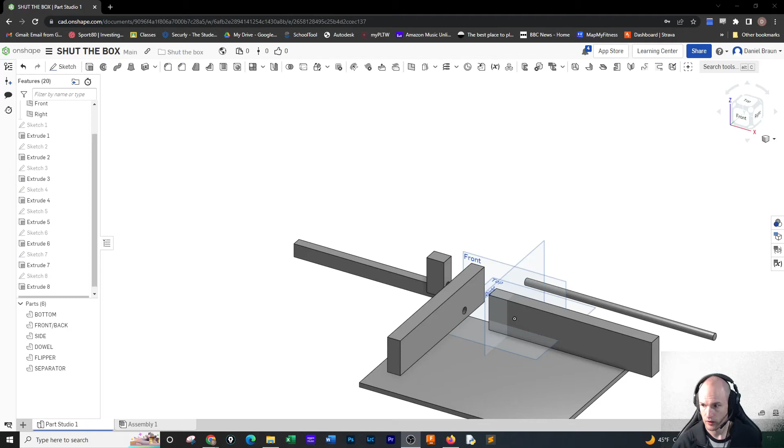So now that we have all of our pieces, we're going to go into the assembly. I'm going to insert the pieces. I could insert the whole part studio and add what else I need, but I'm just going to insert the bottom first.

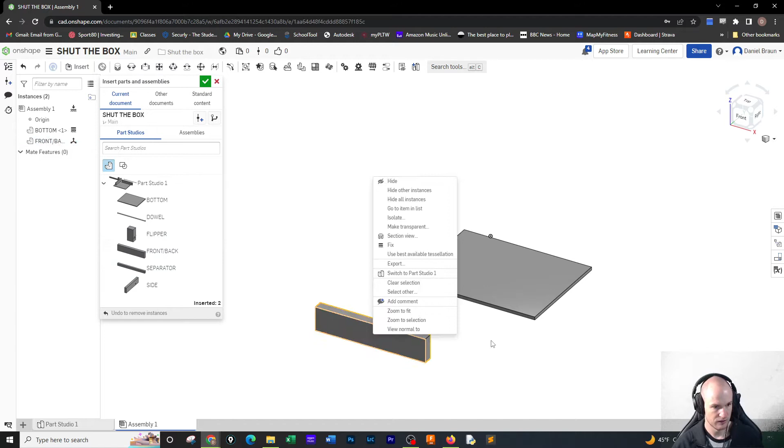When I insert the bottom, I'm going to fix it because everything's going to stick to the bottom. I'm going to add in 2 front pieces and 2 side pieces. Now notice how I drew them, so I'm not going to have to rotate them.

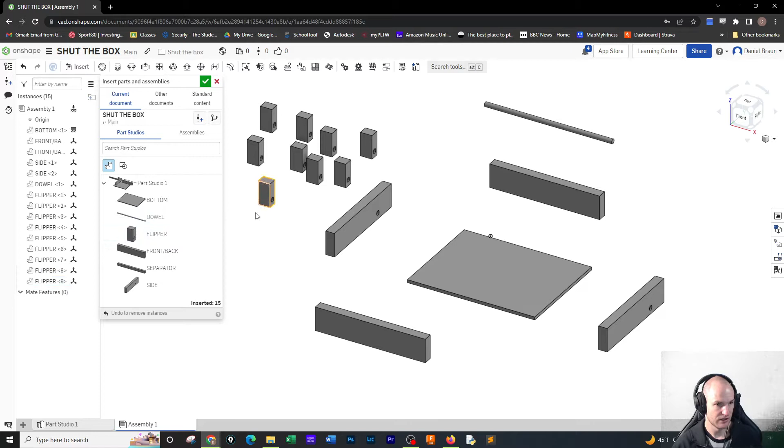I'm going to add in a dowel. I've got to add in 9 flippers, which is super annoying, but got to do it. I only had to draw it once, so that kind of helps. Then I'm going to need a separator, but I'll just put this off to the side because it's the last thing I'm going to do.

Okay, so I haven't assembled anything this big in Onshape, so this should be an adventure. But basically, I've got this piece, and all these pieces are kind of how I want them, so I don't have to worry about moving them too much. I can just go straight to the mating.

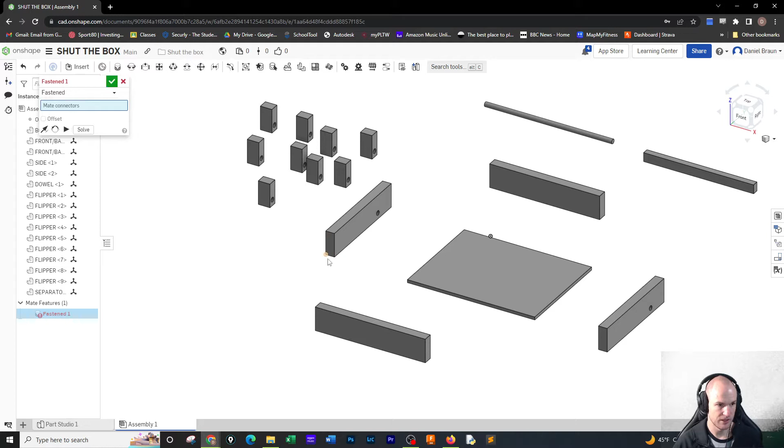So I'm going to do a fasten mate, and I'm just going to start. I want this piece, the bottom here, to go right on this bottom corner. Get the orientation circles the same way, and it should snap right on there.

Looks good. I want this piece - I grabbed it right in the middle, so I'm going in that middle outside edge. It should go right to the middle on this outside edge. That looks good.

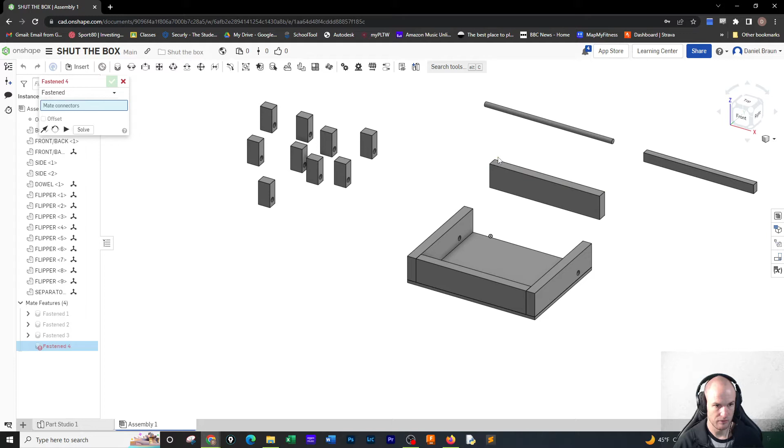Same thing here: middle, outside edge, middle, outside edge. Good. And then let's do this back corner here. Super zoom in on this - get it? This back corner should be going on that back corner.

Okay, that's good. This I'll do later - it's going to need an offset. And these all are going to go on and they're going to need offsets.

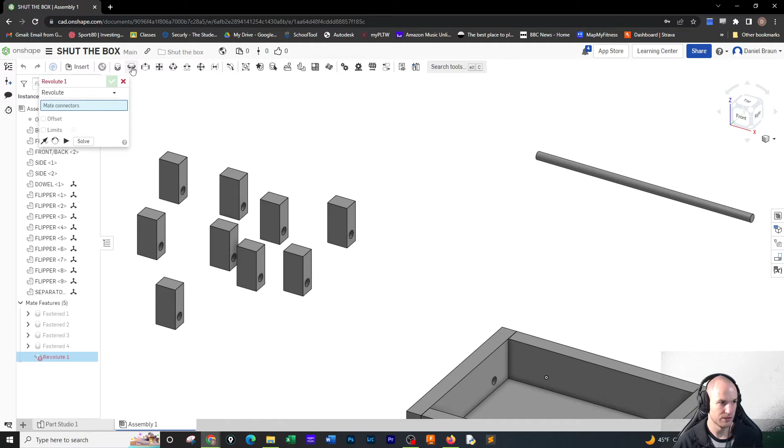I believe there's a couple ways you can do this, because you can do this with a revolute mate - and that's kind of what we're going to do because it's going to let us move them. I could set limits if I want. But let's see, I'm going to click on the outside of the circle here.

I'm going to click on the outside of a circle, and I'm going to click on the outside of this circle. So that's the revolute.

I've got to do an offset, so I want to offset in the Z direction. Let's see, I want to offset at least an inch - or, so 1 inch is no good. Remember, the side is 0.75 that it's sticking into, so I probably want to go over like 1.5 to get me the 0.75 I want.

It's on the end, so it's 1. I'm going to say I need to go over at least 1.75. We'll say let's go over for the first one, 2. Okay, check - and now I got these pieces together.

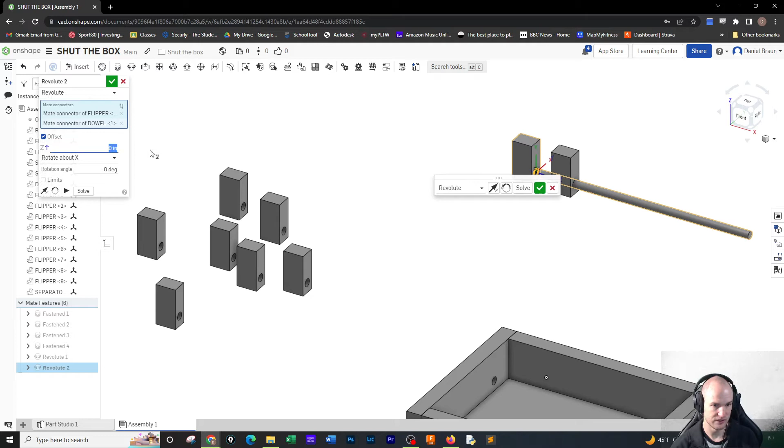And then I'm just going to keep doing the revolute. I can just go revolute here, and then I can say offset in the Z, and I can do 3. Then I can do the next one - oh, don't want to do that. Let's see, offset 4.

And I'm going to hit solve. And you see it lost one, because I didn't check it off. So let's take a step back.

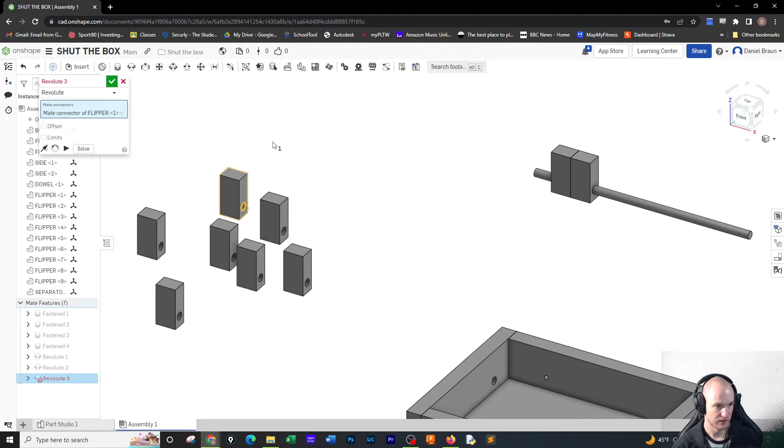Got to hit check every time. So once again, offset of 3, solve. Now I go to the next one. Click, click, offset of 4, solve, and just go through the process of moving them all on there.

And the reason we're doing a revolute, and I could set limits if we wanted to get fancy. We could set limits, we could actually put little gaps here if we wanted, but I'm not that intensely into this right now.

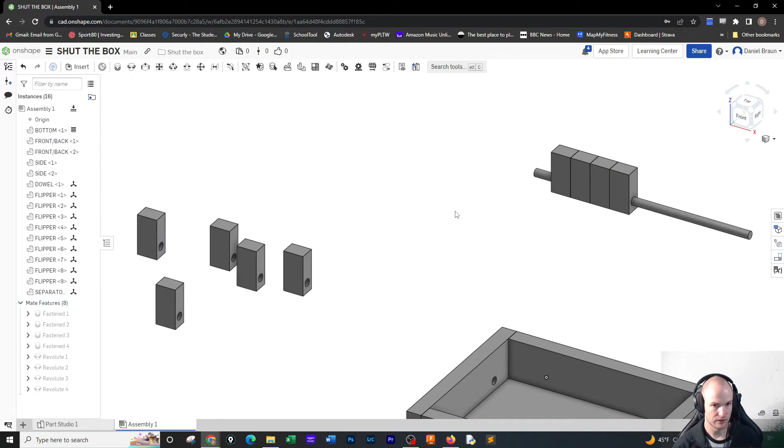6. Oh dear. See, that's what happens if you don't hit solve. So I've got to do the 6th one again. Offset 6. Solve.

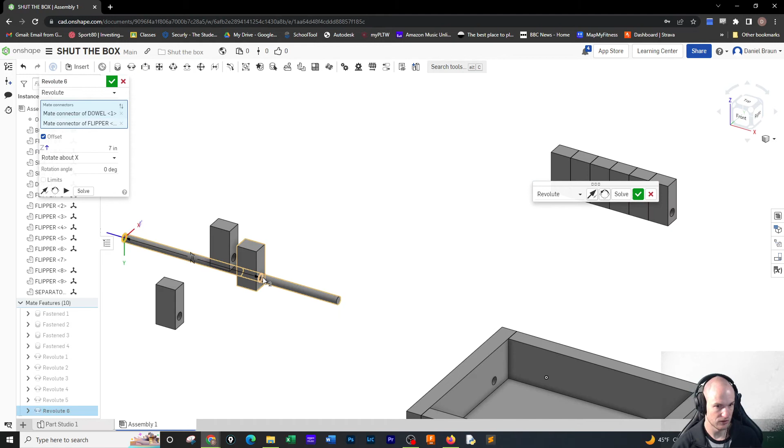Offset 7. Solve. Solve. Offset 8. Solve. Offset 9. Solve, and there should be enough room to offset this one 10.

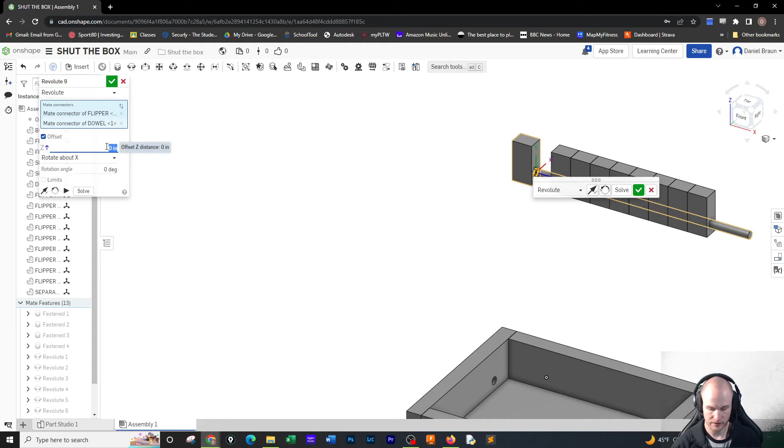And hopefully nothing's going to run into an edge. 10. Solve. Now, for all those ones I wanted Revolute, and there's a reason I wanted them to be Revolute, and you'll see it in a second.

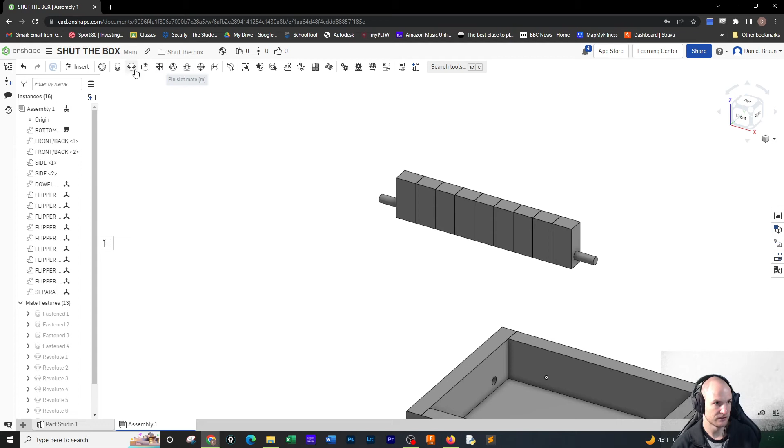Now I can do all sorts of other mates, planar mate, cylindrical mate, slider mate, but I think this one, I'm just going to go, I want this edge to be on that edge because I don't really want it to move. And all those pieces went with it when I did this.

And the cool thing about this is since the bottom's fixed now, if I get rid of this mate connector here, I can move these pieces like you would in the real game. And you can actually set limits on how far the flipper moves.

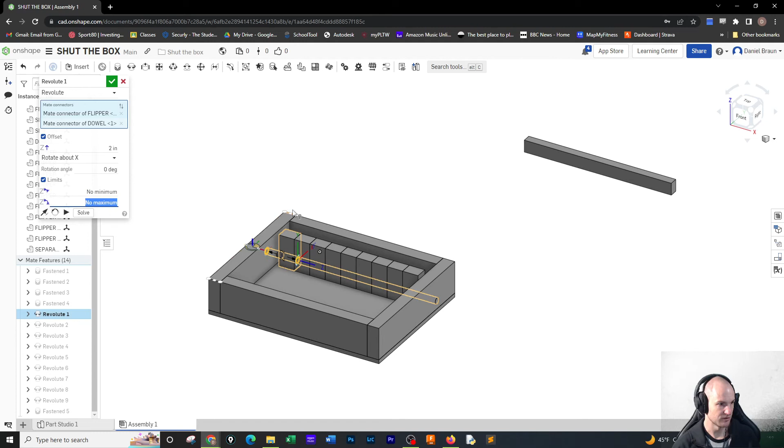If you look at the mate feature on the Revolute, I could click that and then go in here and put limits on it. I could say the minimum in the Z and the maximum, and it could show you how far it goes between here and here. I'm not interested in that right now, but you can make it so it only goes down to here and only back to there. But we're not going to do that.

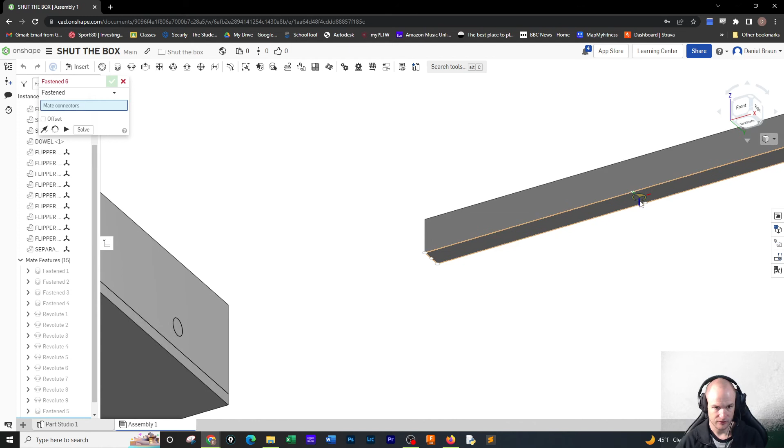The last one I got to put in is this piece, and I think the easiest way to do this is to kind of find the center of this, right, on the bottom. And I'm going to find the center of this. All right.

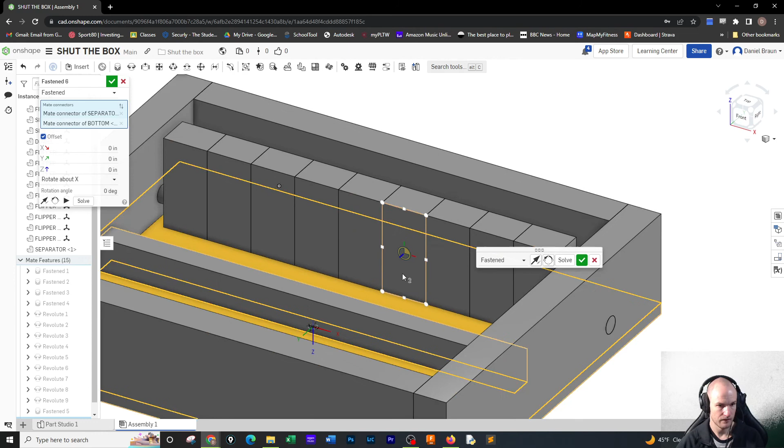And I am going to offset it in the, see how the green arrow for the Y is pointing this way? I want it to go that way. It's in the center right now, so the bottom piece is 8.5 this way. I want it to be about an inch in front of here. So this is 2 inches, this hole.

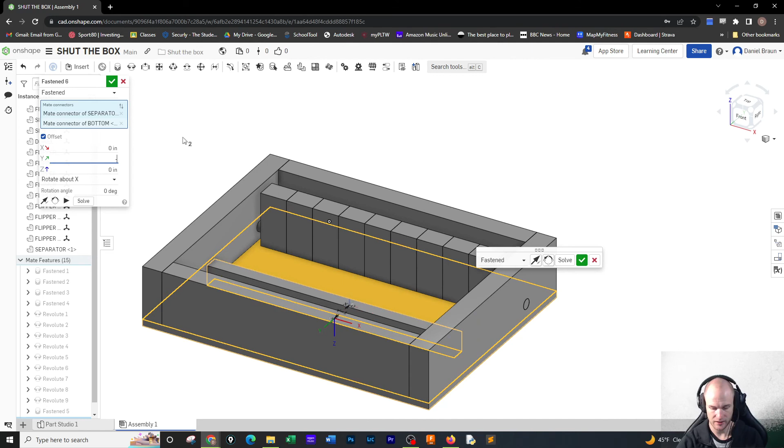So I'm going to say it should probably go, let's see, which way is that going to move it? 1. Okay, so it's got to go -1. Let's look at that. And I'm going to look at it from the top. And that looks perfect to me. So we're going to just offset it back -1.

All right, so this is your entire assembly. You can see, oopsies, don't want to do any of that. You can see now the pieces would go down, and we could set a limit where that would be the max range, and this would be like maybe the minimum range. But we're not going to get into that and all that jazz.

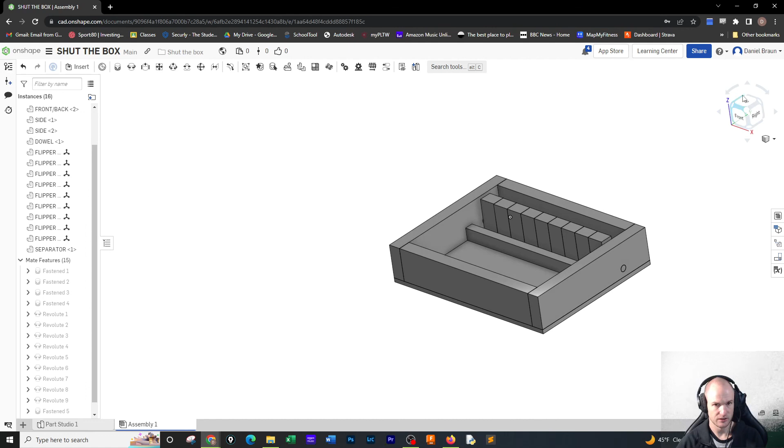But this is to shut the box. This is about the size yours will be. This is how it will look. And we got to worry about dimensioning now. So when you're done with this video, you can save it and you can go look at the dimensioning one. Okay.